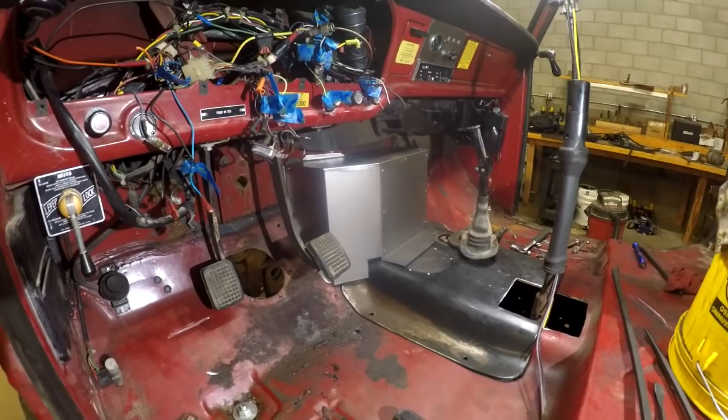Regarding that doghouse and the intake manifold on the engine, let me get some of that stuff out of the way, and I'll bring you back and relate how I picked up the sleeper and axle and got it into the shop. Okay, back on the haul truck, what I've done this morning is come in and make a template to fill in that top spot of that piece, so I've got that in.

I don't have all the rivets in. I just wanted to get some rivets in so it was fixed in place, so I could come over here and test fit it again and make sure it was going to fit, and it will. I've got to do a little tweak of the sheet metal, put it in and twist it, conform it into the way I want it to fit in there properly. But anyways, that's done - well, it's not done.

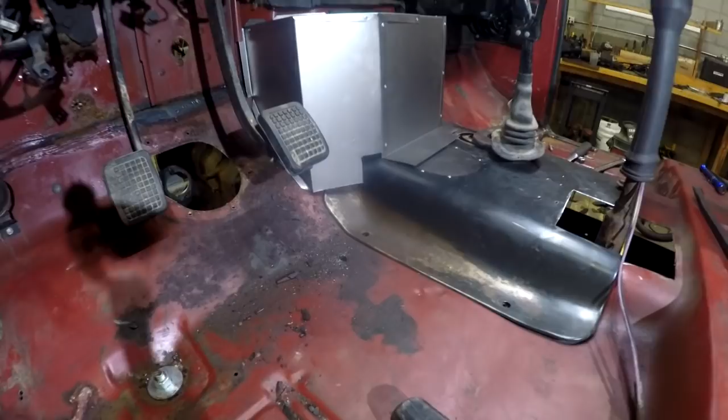It's not in place, and I've still got to come up with how I'm going to address that hole in the bottom. I'm just going to probably add a piece of sheet metal into it, pop rivet it on.

Again, the inside of it is going to be coated with that POR-15 or whatever it is, that paint I'm using on the frame. And then probably what I'll do is get some undercoating stuff and spray on the inside of it also, to give it a more solid coating on the inside, so it helps protect it and dampens vibration sounds and stuff like that.

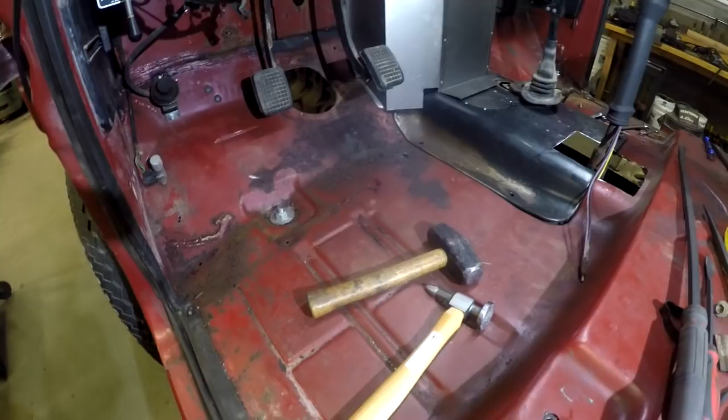On the inside, I'm going to treat it like I do the rest of the truck and put some kind of insulation, whether it's that foil wrap stuff they put in vehicles. I'm not even sure what I'm going to be using, whether a rubber floor mat with maybe some insulation under it, or insulation and carpeting, but that will all go over it so there's sound deadening and insulation properties to it also.

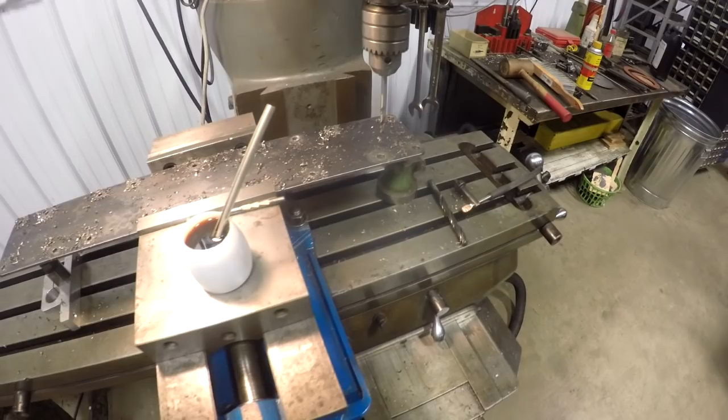One of the other things I'm doing - I'm over here at the vertical mill - this is a plate that I might be using as the intake runner for the intake manifold.

Now, when I say I might be, I'm kind of unsure whether I want to build this thing. Well, okay, so I want to build an intake manifold, and my first thought was to build it out of metal and put the intake manifold out the side, but then I started thinking about maybe building the thing out of carbon fiber. The only thing - if I build it out of carbon fiber, and I've got to do some research on this -

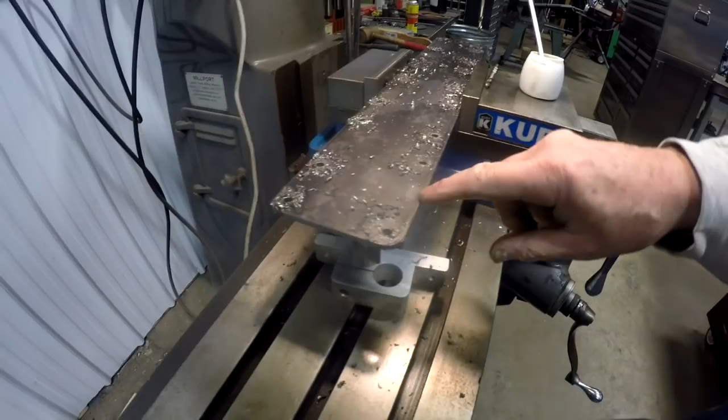is forming the flange where the bolts go through to bolt into the top of the head or the air plenum on the head. I'm not sure how much stress that would be under, and whether I can just use a thickness of carbon fiber to secure it, or if I'd actually have to form a piece of metal into it to help secure where it bolts down.

So in the meantime, what I'm doing is just drilling this plate out, and I'll continue along those lines until I make up my mind whether I'm going to use this for sure or whether I might go to carbon fiber. I had shown you a shot of me working on that plate for the air intake, or let's call it the intake manifold.

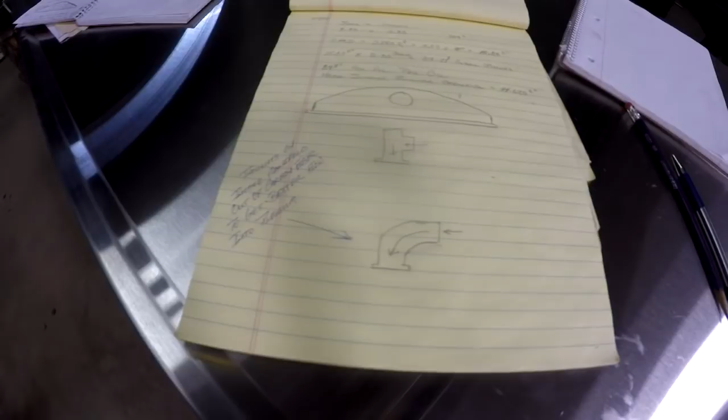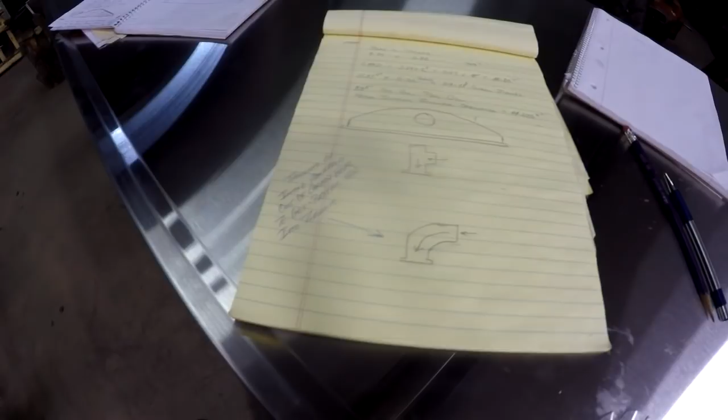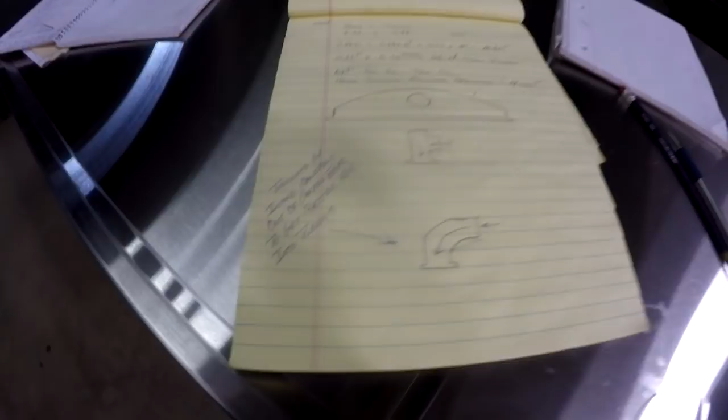The intake manifold, which I discussed previously in another video, would sit on top of the air plenum that's on the head and go into it. My thoughts along the way have always been to make it out of a steel plate, and what I would do is dome it up and have a 4-inch intake into the side of it, which would resemble something like that if you looked at it from the end.

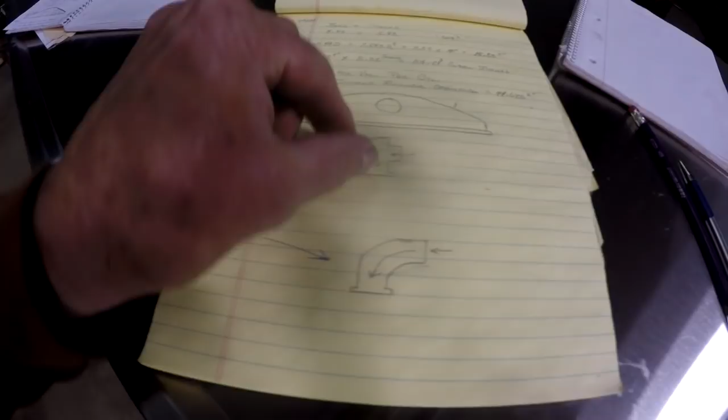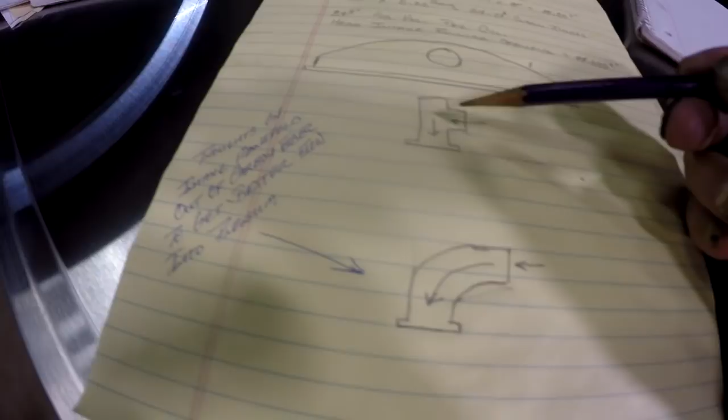My problem was this thing is very narrow. That opening in the air plenum of the head is only 2 inches wide. Now it's 21 inches long, but only 2 inches wide. So if I build this thing on top of it, this 4-inch flow comes into here and crashes into the back wall, creating turbulence and an air dam kind of almost, before it's allowed to go back down. Now it's going to go back down because this is under pressure.

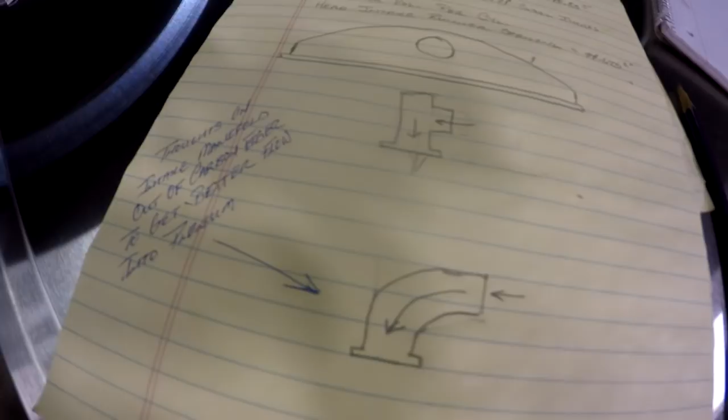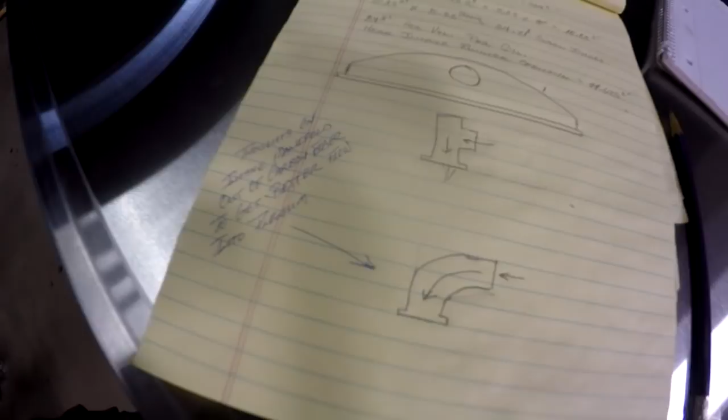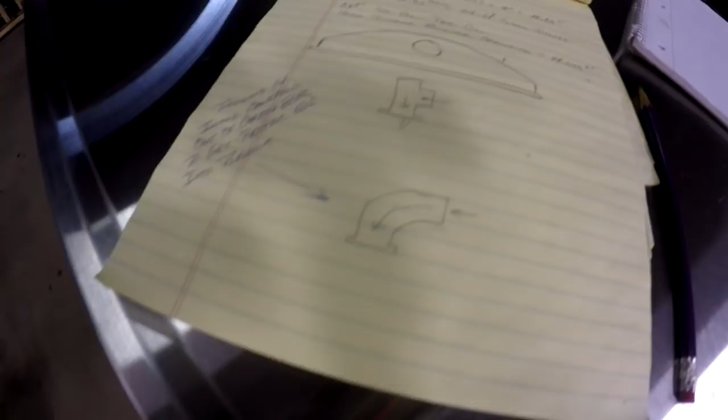It's under pressure from the turbocharger, and when the cylinder goes through its intake stroke, you're actually kind of sucking a vacuum on it as the piston goes down and the intake valve opens up. Like a normally aspirated engine, it sucks a vacuum and pulls that air-fuel mixture in. Well, here it's a diesel, it's on the downstroke pulling air into it, but at the same time you've got a turbocharger behind it. But regardless, you've still got this damming effect where the air is crashing into the backside of that thing and creating turbulent flow in there.

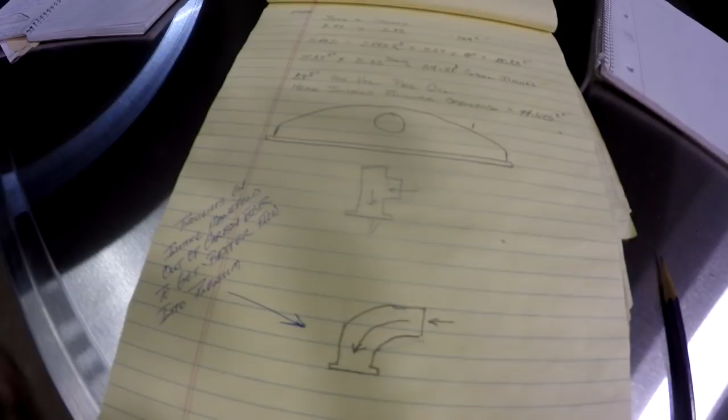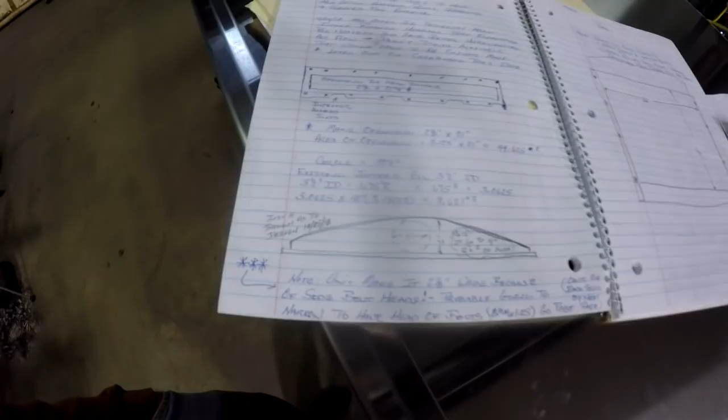Now what I did is just some calculations. If you remember that opening I showed you prior, in a prior video, about that intake runner, how it was 2 1/8 inches wide and 21 inches long, what I did is took the area of that opening, which happens to be 44.625.

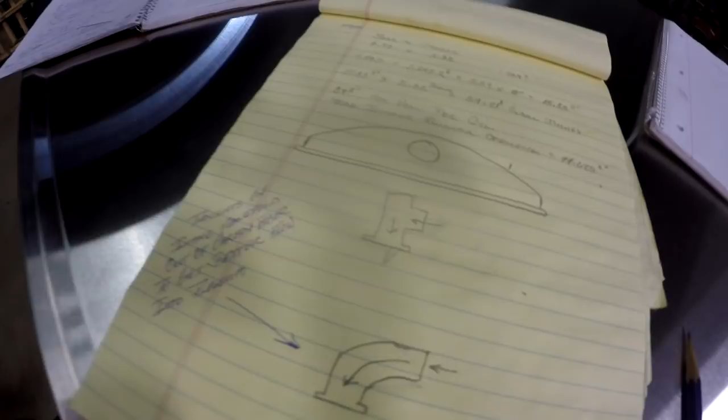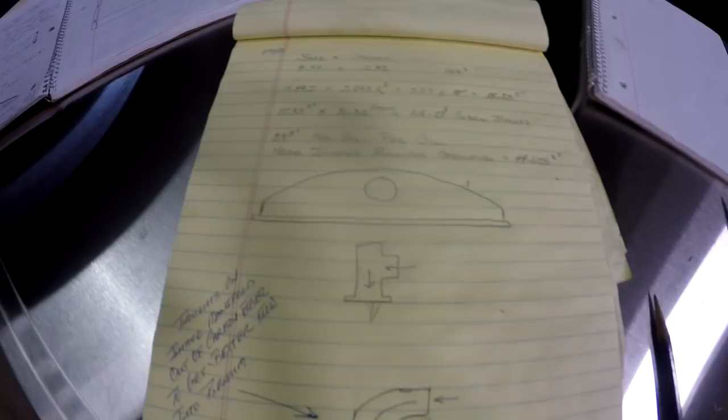Then I took the volume of a cylinder—the engine is 504, but I figured it out per cylinder, and it comes out to 84.21. That's the cubic inches of the cylinder, or the volume of the cylinder, when it's fully in the down position. That's how much air is in there, 84.21. Now if you compare that to the opening of that intake runner, which is only 44 inches, you can see that.

And again, understand the fact that the intake runner is under pressure from the turbocharger and it's forcing air in through there. But still, I want to create more of a flow.

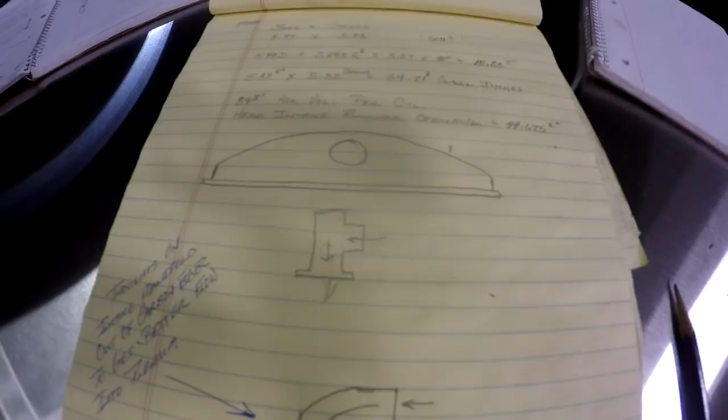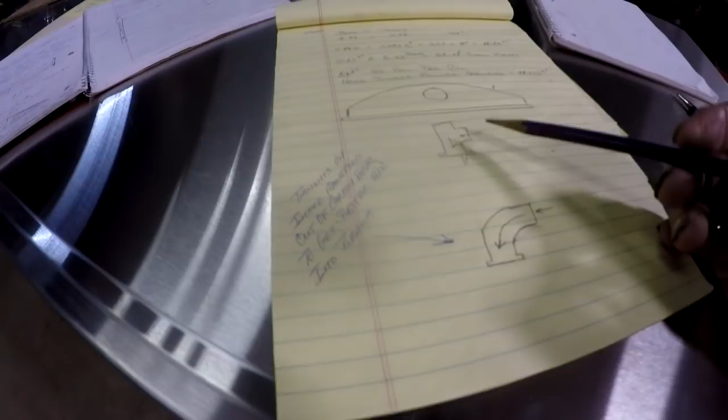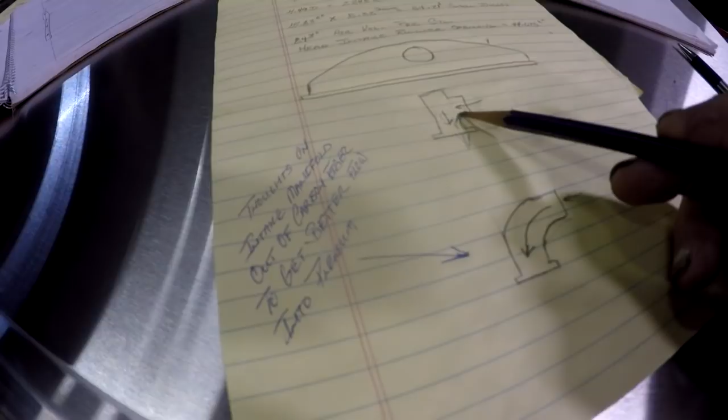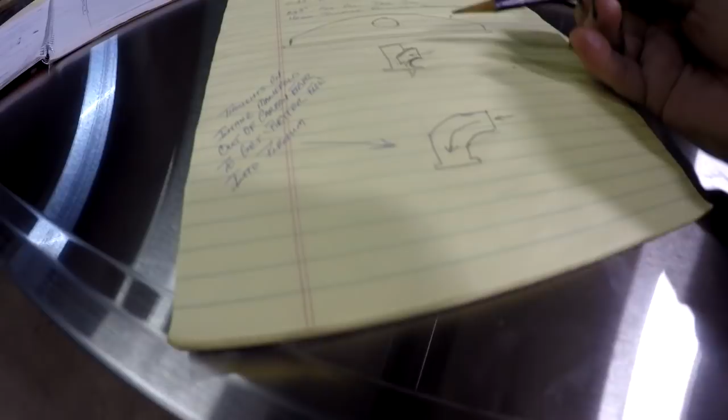So I'm probably going to continue work on that steel one and see if I can, without having a lot of equipment to work on steel sheet metal—basically this heavy gauge sheet metal this thing is going to be made out of—I can't really get this to a curved thing in here to create a laminar flow, a curved flow that is more indicative of getting air smoothly into that intake.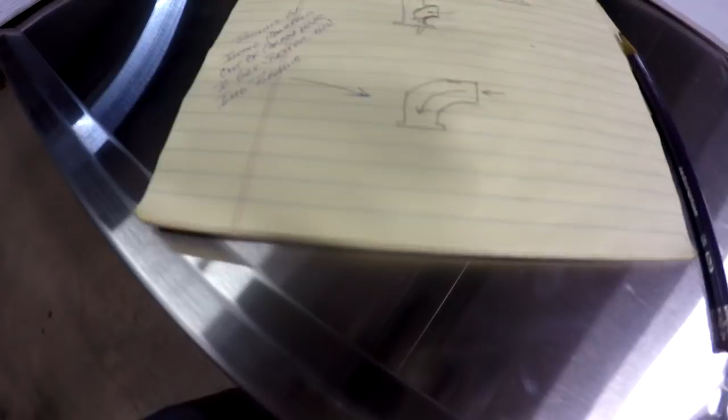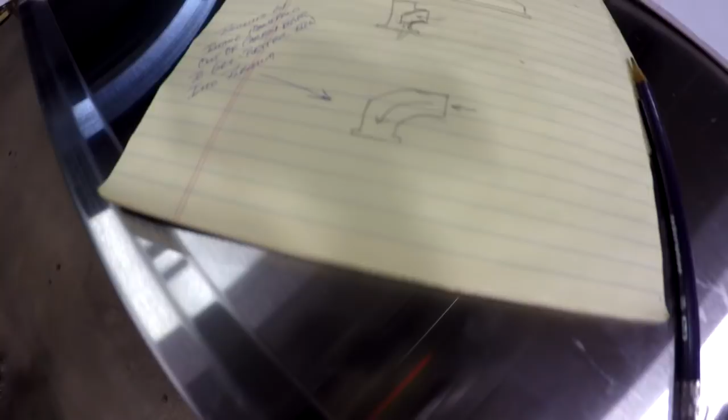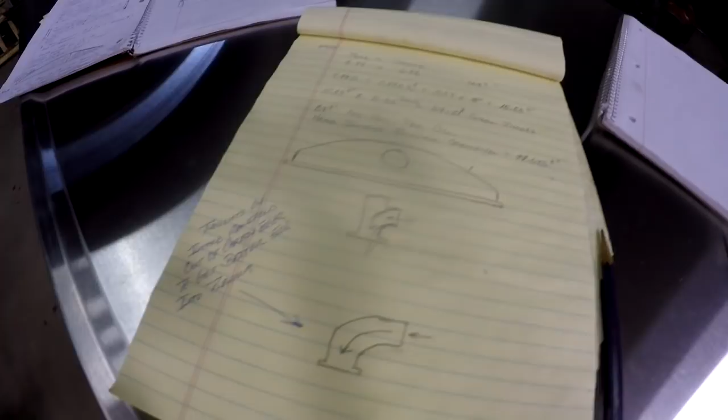But if I did it out of carbon fiber, what I can do is create a mold out of something and form the carbon fiber around it, which shapes it that way, because it's not like I'm taking stiff carbon fiber and trying to form it, or in the case of metal, trying to form the metal to make it. It's pretty hard to do. I mean, if you had rollers and stuff like that, it would be easier, but it's a lot easier to form carbon fiber around a mold.

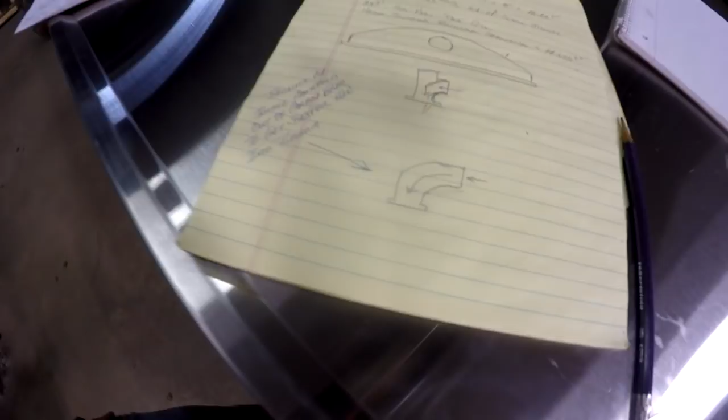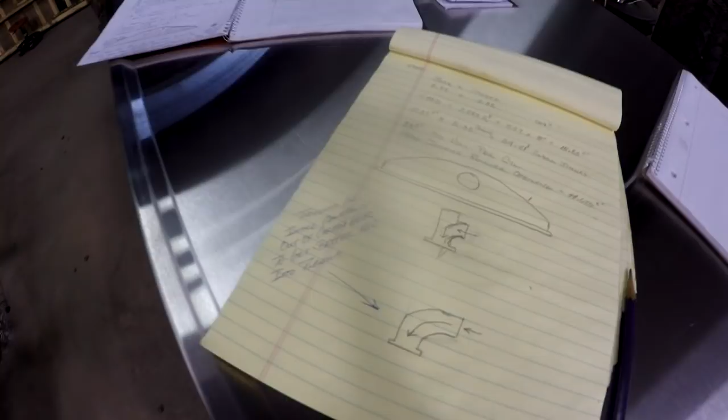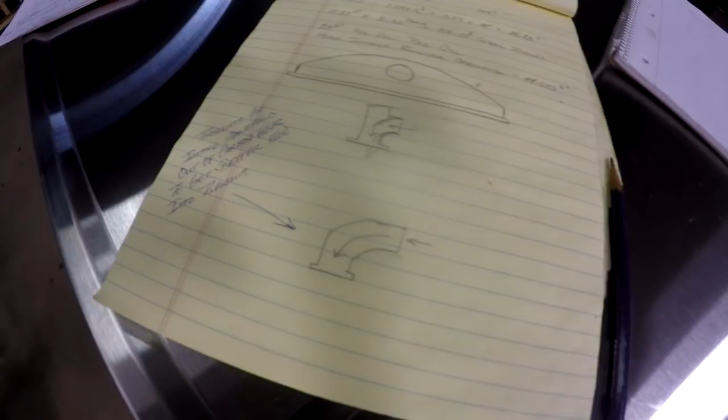So I'm going to continue work on that steel intake, but my thought train right now is going towards carbon fiber, so that I can get a better laminar flow into that intake runner. But I just wanted you to know, because sometimes what happens is I start working on something and pull off. In this case, I started working on it and then pulled off because my thoughts were maybe I should be making this thing out of carbon fiber so I can get a better intake design that's going to provide a better laminar flow into the thing.

Okay, it's Tuesday morning. Last chapter, 34, I told you that I had secured an axle and a sleeper. Well, yesterday, Monday, I went down to the salvage yard and picked it up. I had told you in chapter 34 that all I had seen of the sleeper was up on top of the connex. I never was able to get up on it, see the backside of it, or see the interior.

Well, I got it when I went there yesterday. They had taken it down off of the connex and had it on a big skid, ready to put it on my trailer. I saw the guy that taken me around looking for the battery boxes, and he says, we got that sleeper down, and I think you're really gonna like it. It's really clean inside, and it's even got a refrigerator in it.

So lo and behold, while I was waiting for the guy to show up with a forklift, I was able to get into it, and the thing is really clean inside. Now it's on my trailer, with the axle, the front axle, but it is raining really hard outside, so I'm not going to take you outside and show it to you.

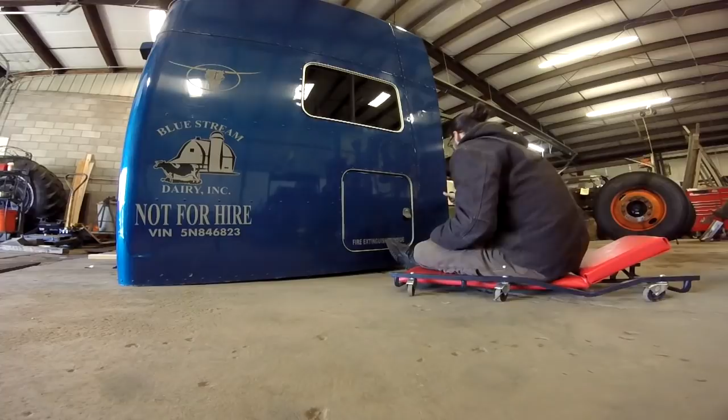Okay, you're probably wondering what's going on here. Where is a tour of the sleeper? Where is footage of unloading it and bringing it into the shop?

This is my grandson. What he's going to be doing is picking the locks to those compartments underneath the sleeper. When I got the sleeper, I did not get any keys for it, so to get into it, he's going to pick the locks on it. As he's doing this, I'm just going to do this voiceover.

What happened is when I picked it up, like in previous videos of that salvage yard, it is just chaotic. You're standing around waiting for somebody to show up with a forklift truck to get the stuff loaded onto your trailer, and it's just chaotic. So I did not film any of it. I didn't even take the camera with me because it was just a miserable day again.

I got the thing back good on Monday. Parked the trailer because I didn't get back until late in the afternoon. Then on Tuesday we unloaded it. Tuesday again was a miserable day. It was raining on and off, and it was just extremely windy all day long.

This is my grandson picking the lock, as I had said, and the two of us unloaded the sleeper and the axle off of the trailer on Tuesday. It was, again, really windy, and he was a little leery of picking this thing up unrestrained off of the trailer with a forklift because of the wind gusts. But we did get it off okay.

Anybody familiar with that? Blue Stream Dairy Incorporated. I kind of did a Google search on it, and the only Blue Stream dairy that I could find was in Ohio, and they really don't have a website, so can't see if that logo fits anything.

Again, we ended up picking the locks to get them open. Originally I thought that window was busted, but it turned out to be a spider web.

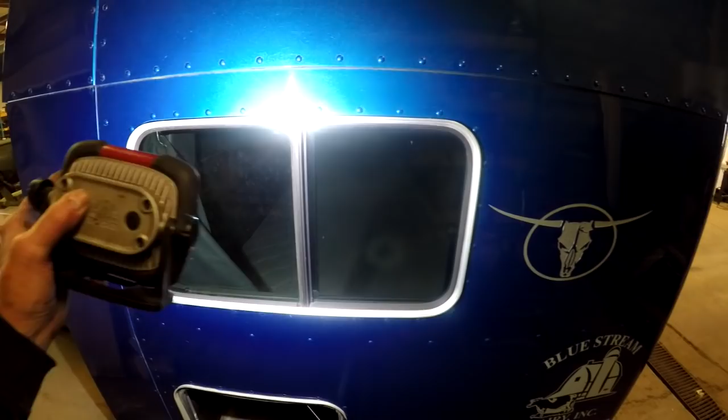And these stainless steel brackets up here are for backup lights, or kind of spotlights for cargo lights.

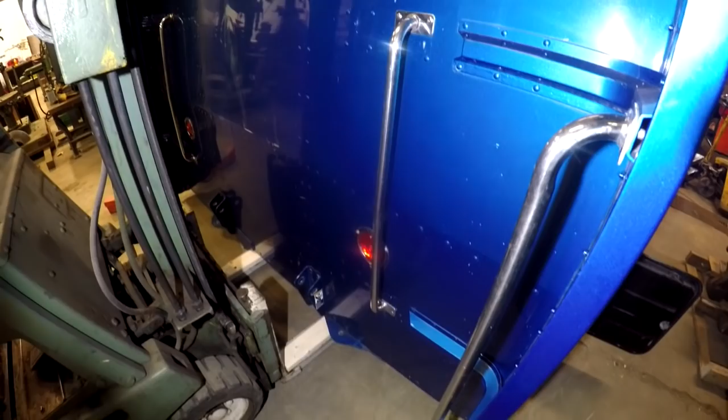But anyways, there it is. As you can see, there's ductwork in there.

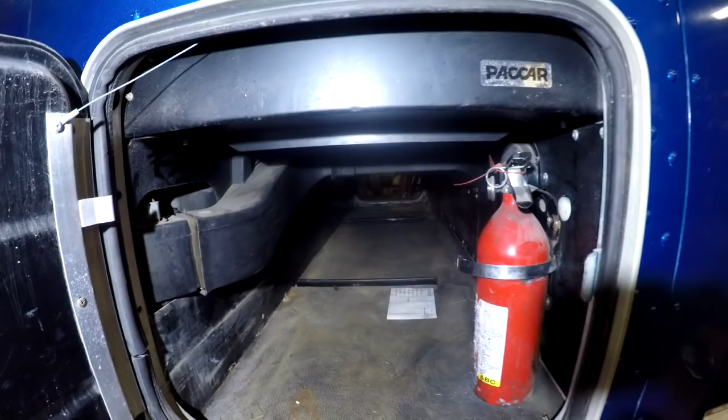Now, in a previous video, I mentioned that there was a refrigerator. Refrigerator is up here.

Hang on a minute. Okay, sorry for this until I get light in here. Just gonna have to go with the spotlight for now. So here's the refrigerator, kind of dirty, but it's a refrigerator.

Hanging closet - there's a bar up there to hang stuff off of. Of course, it hasn't been cleaned out yet.

Lights all over the place. There's two like reading lights over there. There's two lights up here and like a fluorescent fixture up here.

Plenty of storage space. And up there, I've never actually seen up there, so I haven't. Kind of need a stool or something to see up there.

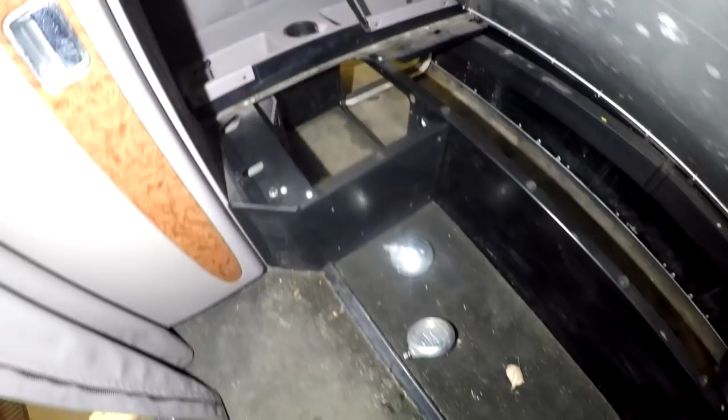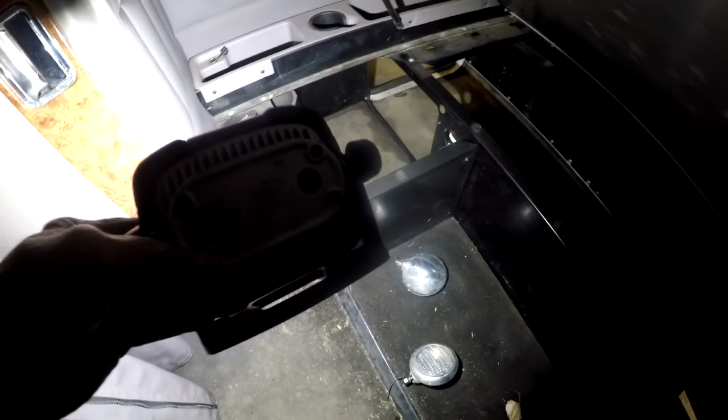The only thing that's not in here that I could possibly ever want also would be an inverter, but I'll put that in there.

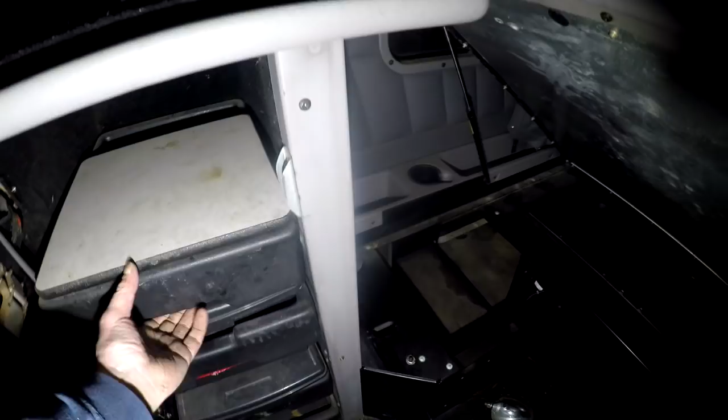So this thing over here is like fold out drawers and stuff. This upper one needs some oil. This upper one is like a little desk where you can put your laptop or something, or write paperwork.

I think that one down there is for hanging folders, and there's a place for, looks like there might have been a TV in here because that looks like a television cable. 12-volt outlets up there.

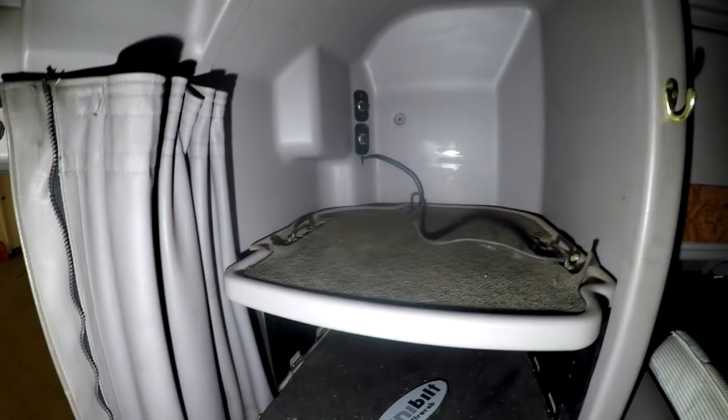So I gotta tell you, I'm really happy with this thing. Really happy with it.

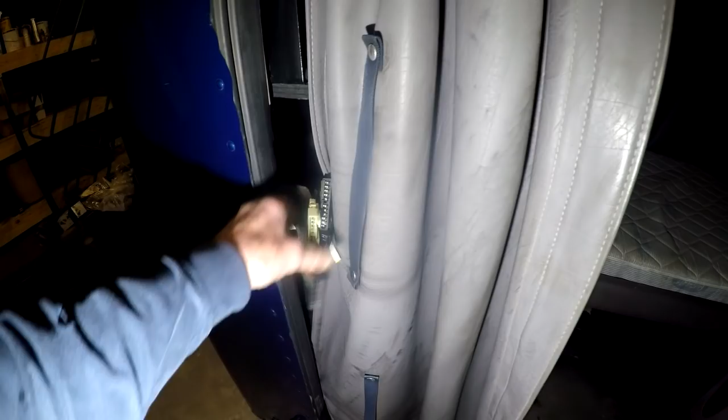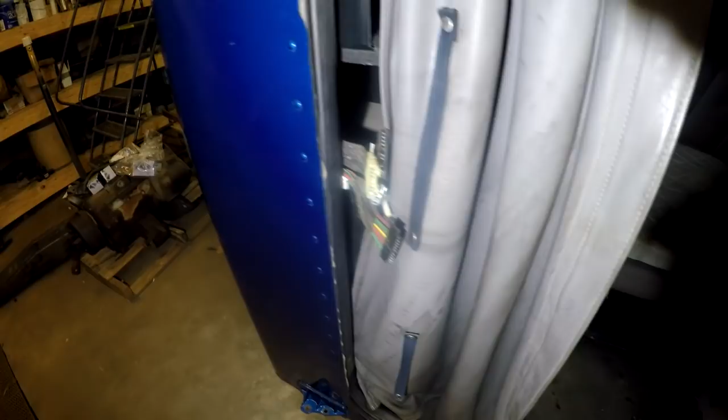Now what I'm gonna do is contact these people, because here is the wiring harnesses off of it. Now I could get a 12-volt thing and kind of go through it pin by pin and try to figure out where they're going to, but my first option is to get a hold of them and see if I can get a wiring diagram for it.

I have the manufacturer, the plates were on there - one was in the back, Unibilt Ultra Cab. The other plate is in the storage compartment, or is sitting on the triangle box right now.

But I am really happy, really happy. So I'll bring you back. Oh, here's the axle.

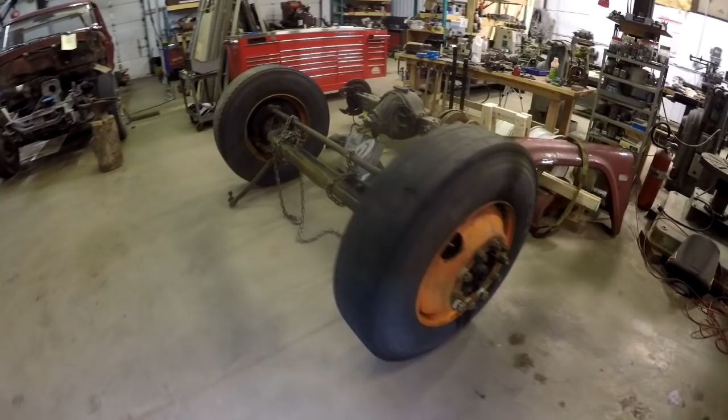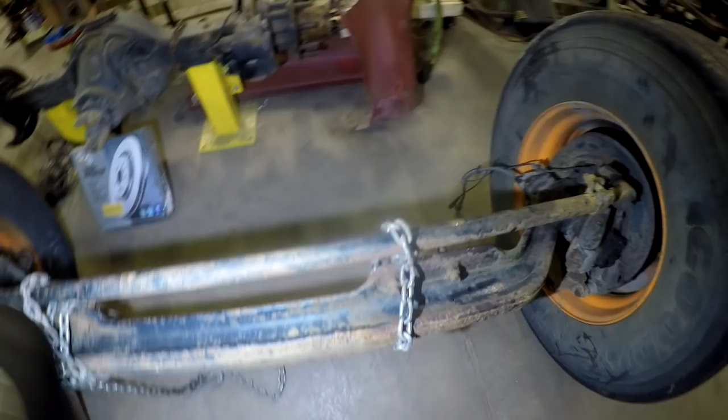Really happy about this stuff, really happy.

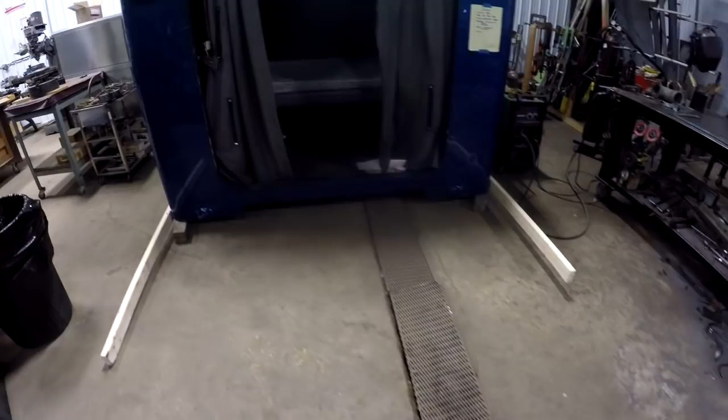Okay, bring you back. So, back on the Ford haul truck. What I did is I moved the sleeper to a different part of my shop, got her over here by the welding area, just to get it out of the way of the bay I usually drive into to wash my truck, service my truck, work on other vehicles.

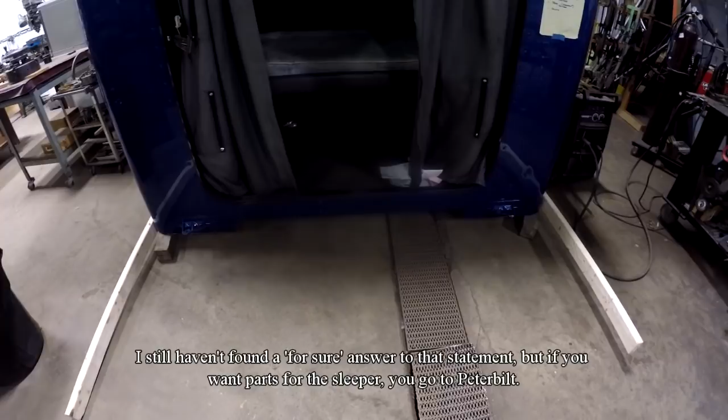I had mentioned in the previous video, I had definitely pegged this thing from a Peterbilt. Now, in starting to research Unibilt, who made this sleeper, it's not a company. It's actually part of Peterbilt. The VIN number from this sleeper is supposed to match the VIN number from the truck.

Now, how I know that is, I tried to do a lot of searching on the internet to find stuff out, and probably after an hour of going through bullshit - and when I say bullshit, it's not really bullshit - it's when you plug this stuff in, what comes up is eBay sales or truck places selling sleepers. You really can't get definite information about whether Unibilt is a division of Peterbilt, or how does it work.

But let me tell you what I did today. I kind of thought, why don't you go down to Peterbilt and see what they say?

And what happened is I went down there, and I got to tell you, the guy - I went to the service desk and I was asking one of the counter guys, and another guy came out when he heard my question, came out and helped me, and said if I could identify this sleeper, and I will explain how you identify it in a second.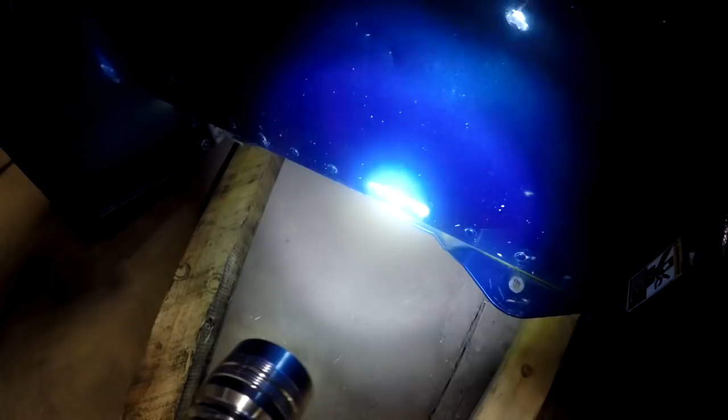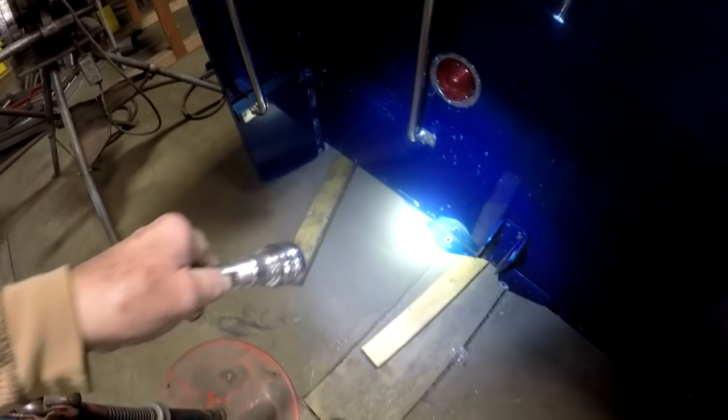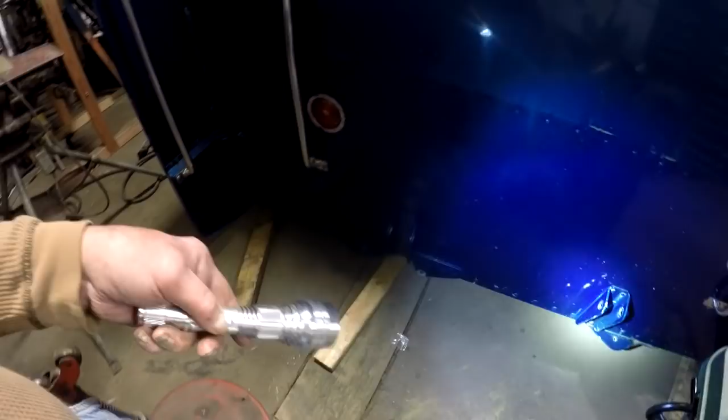Ironically, he says the VIN number will match the truck number. Now, you saw the VIN number on the truck. This VIN number on this tag is off by 2 digits - the ending digit here is 4, and what's on the truck is 6. But he ended up taking me out into the yard to a Peterbilt truck and showed me the VIN number off the sleeper on that new truck. He says all Peterbilt trucks have that VIN number down there. Sometimes if you go to a salvage yard they'll pull that plate off, but I got lucky and it's still there. So he said if I can give him that number, there's a very good chance he can get me the wiring diagram, and definitely get me the boot that goes in between the sleeper and the cab.

Let me take you over to the truck.

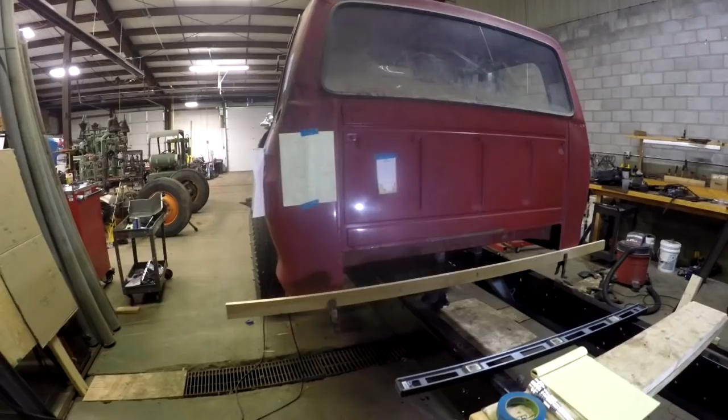Yesterday I took you over to the sleeper and was talking about going to the Peterbilt dealership, showing you that VIN number tag on the back of the sleeper. I came over here and continued that video, and what happened was I was holding that flashlight and didn't realize until I downloaded the videos how bad it blew everything out. So let me cut off here, and I'm going to show you a little segment of that.

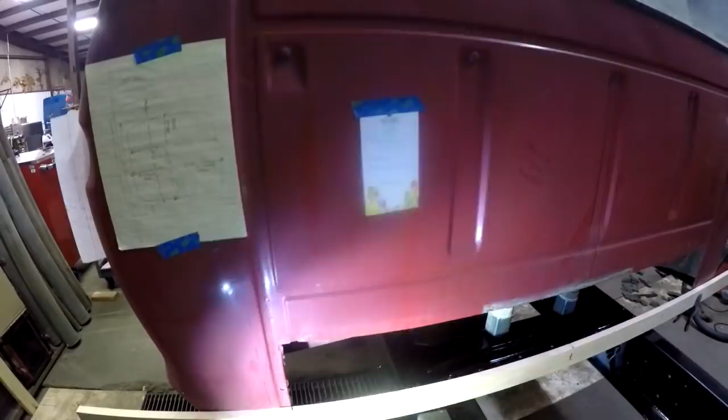I'm going to show you something kind of ironic. Before that, this piece of paper came from quite a while ago, long before I knew what sleeper I was going to get. I had gone on the internet and got some dimensions on a sleeper, and ironically those dimensions are off a 379 Peterbilt. What do you think I ended up buying? A sleeper, a Unibuilt sleeper off a 379 Peterbilt.

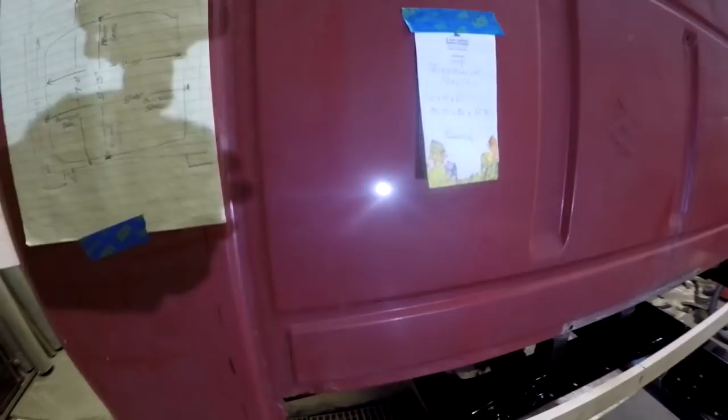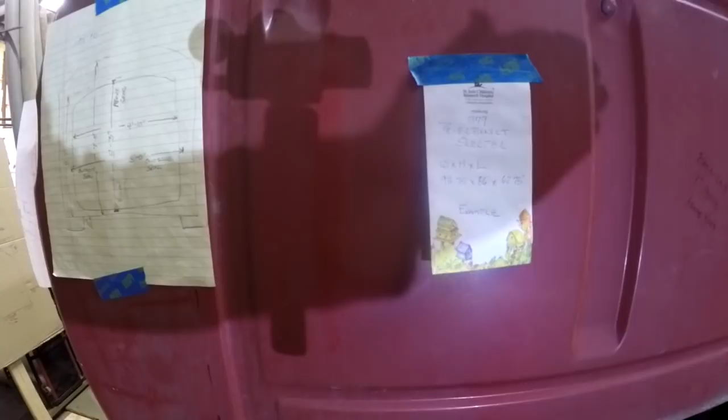So what I was talking about was this piece of paper - hopefully you can see it. That's what I was talking about, how ironic it was that I got those dimensions off the internet, and it turned out I got that exact same sleeper.

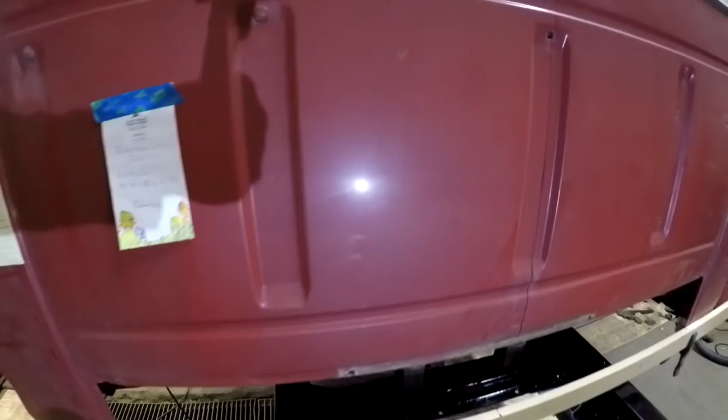One of the other things I talked about was I established a center line over there. You can see that straight line going up, just offset of the cab, at that indentation in the cab. You didn't know these indentations are put in the cab to strengthen the panel, keep it from getting that tinny, bowing effect when you go over bumps. Anyways, that's the center line.

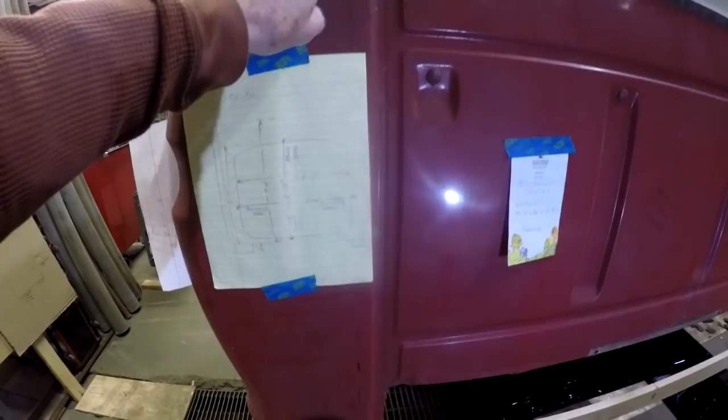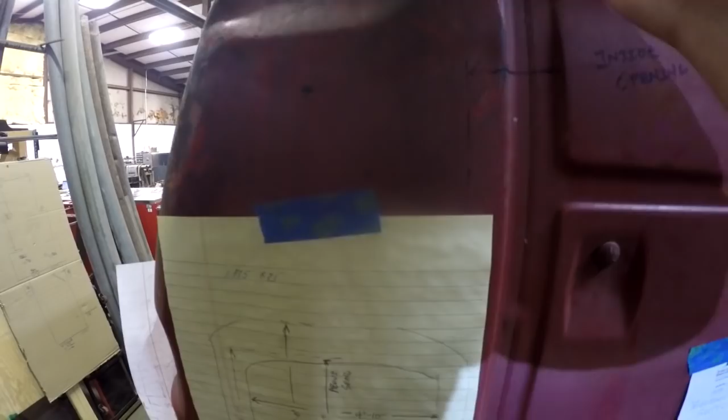What I did is come out here and mark the opening again. I had shown this yesterday, but I was holding that flashlight and it was blowing the thing out totally. So there's the center line - I'm sorry, it's not the center line, that's the opening of the sleeper, and the rubber seal fits on the outside of it. As you can see, the opening passes through the window plane a little bit, but it should be covered by the seal. I've done the same thing over on the other side.

The issue is the sleeper does stick up above the top of the cab. Not only does the sleeper stick up above the top of the cab, the opening extends up above the top of the cab too. So I guess I've touted the benefits of that sleeper and what a great deal I've got, but this is the downfall of it - I've got to come up with something that will seal off the area between the top of the cab and that sleeper opening, or above the sleeper opening, so I can get that rubber weather stripping sealant in between the cab and the sleeper.

I'm probably going back to the Peterbilt dealer today to see if I can get the wiring schematic, and see about that seal in between the doors.